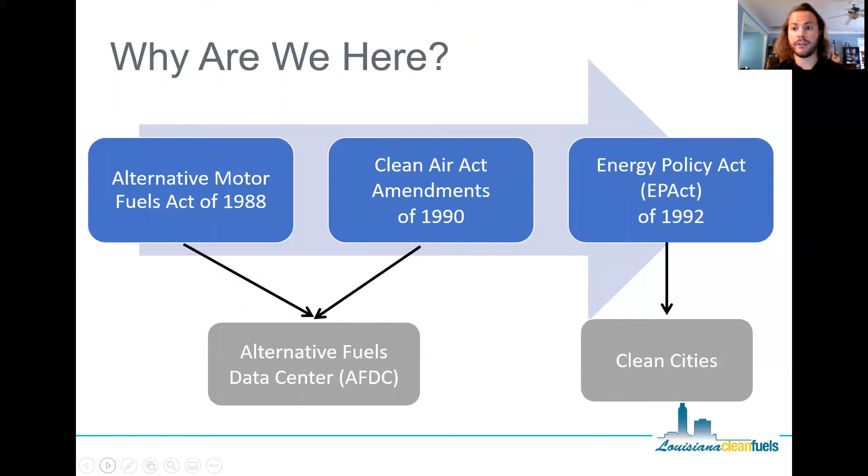And then later on, we had the Energy Policy Act of 1992, and that's really what directly spawned Clean Cities. Clean Cities is a local partnership, a series of local partnerships. There are around 100 coalitions across the country, and within our individual territories, we make up around 80% of the total U.S. population.

And then one of the wonderful things about Clean Cities is that if you're outside of our population or our territories, we'll still work with you. So if you don't quite have a Clean Cities as part of your territory, please reach out to them, because we still love to help in any way we can, and really provide technical assistance and any sort of help that we can. I'll talk a little bit about that in a second.

So, we're part of a Department of Energy program, and the priorities that set the stage for Clean Cities are national security. Alternative fuels are domestic fuels. We produce our own natural gas and propane and hydrogen, electricity, of course. So just all those alternative fuels, we produce them here, not having to rely on any sort of imports for those fuels. It has a lot of national security benefits to it. There's also economic growth.

These fuels being domestic fuels keeps the economy growing here in America. This also results in affordability for businesses and consumers. When you have multiple competing fuels that all work together as part of this bigger portfolio, that competition drives the prices down. And many alternative fuels, in large part because they're produced domestically, are actually cheaper than gasoline and diesel.

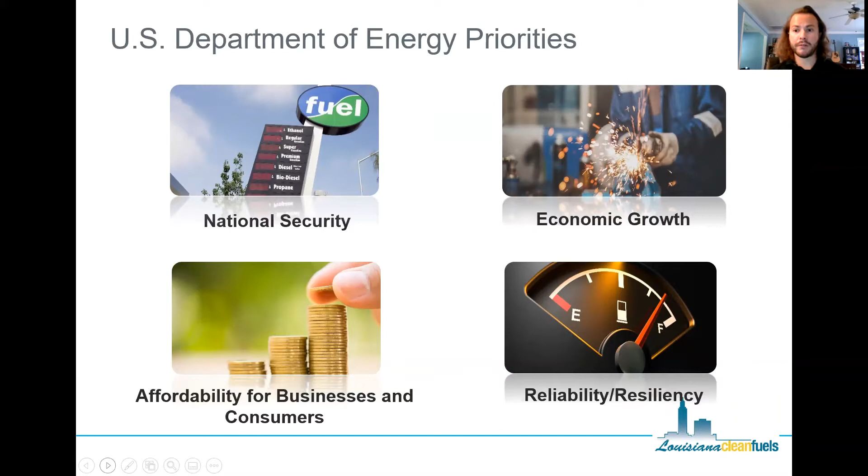And then also just reliability and resiliency. When you have redundant, multiple fuel types, if one of them goes down for whatever reason, say the electric grid goes down somewhere, you can start relying on a different fuel, or vice versa in any other direction. So that resiliency is really a valuable part of why alternative fuels are important.

So how does Clean Cities in particular fit within Department of Energy? Well, we're under the Vehicle Technologies Office, and that office has 5 main components: electrification, advanced combustion systems and fuels, materials technologies, and energy efficient mobility systems, a kind of newer focus that looks at the entire mobility system as a whole and digs down into how different changes affect total energy usage across the entire holistic system. It's a really interesting program.

And then we have technology integration, which is exactly where Clean Cities fits. We really work with the end users as well as the providers and the national labs to figure out exactly how we can best get these fuels in the hands of consumers and fleets, and make sure that they're working as well as possible, and then really increase the efficiency and lower the cost of operation.

And then see down here below, the VTO really focuses on these 4 pillars: energy efficiency, domestic energy security, reducing costs, and global competitiveness of the U.S. economy.

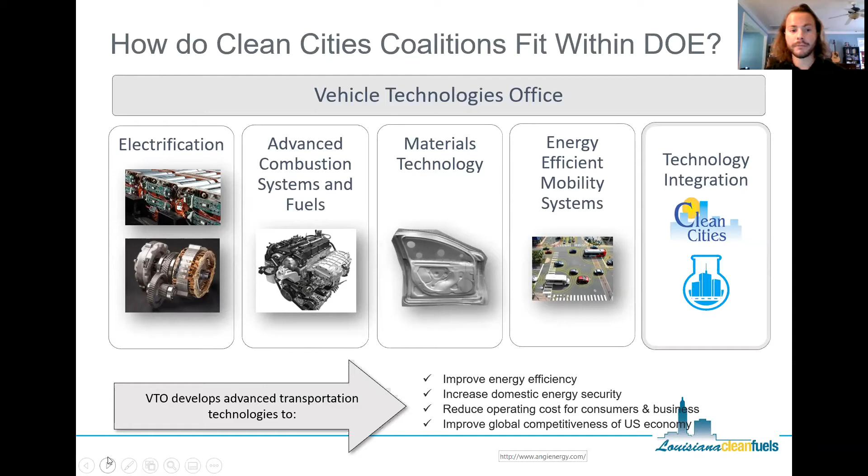We deal with all the fuels. We are what we call fuel agnostic, we don't pick and choose winners. Everything that we do is data driven and tailored to the individual we're working with, whether it's a fleet, municipality, or just individual consumers. We deal with all 6 of the major alternative fuels: biodiesel, electricity, ethanol, hydrogen, natural gas, and propane. And then across all markets, light, medium, heavy-duty vehicles, refuse fleets, transportation fleets, we deal with everything. So really, in any sort of efficiency measure that a fleet or an individual is trying to undergo, we're there to help with anything that we can.

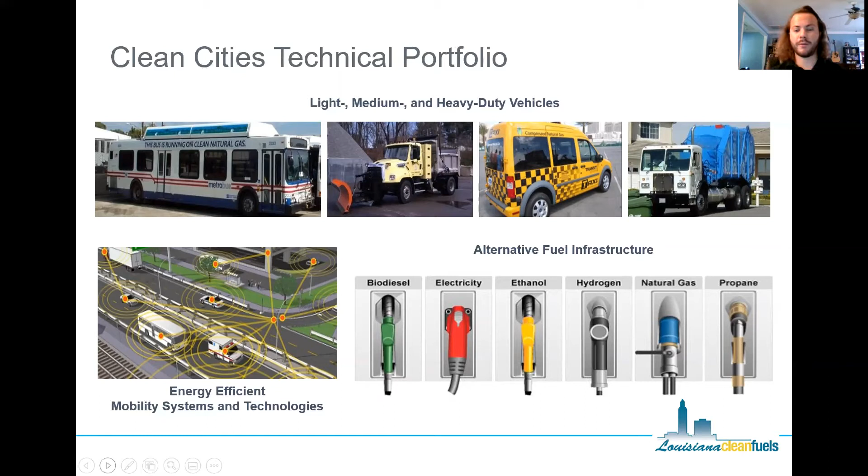I always like to have this slide because this is news. When you talk about greenhouse gas emissions in America, for the last 100 years, the largest emitting sector has been electricity. That's been decreasing over time, with moving towards natural gas or renewable fuels in the electricity grid, which has reduced the carbon impact, along with efficiency gains across the board. In 2018, transportation actually overtook electricity as a greenhouse gas emitter for the first time. So that kind of means the ball's in our court when it comes to dealing with transportation, since we have the largest slice of the pie, and we can work on that.

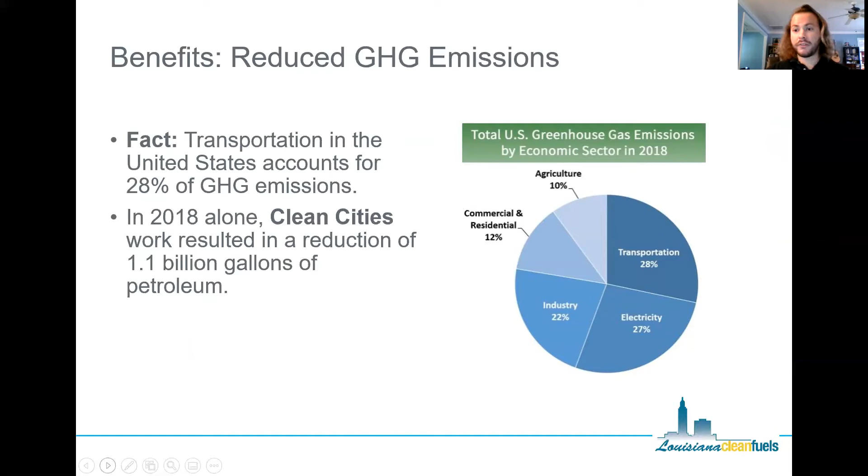In 2018 alone, Clean Cities work resulted in a reduction of 1.1 billion gallons of petroleum, which is an absolutely massive number. That's the work we do: increasing efficiency and moving towards alternative fuels, and that really benefits everybody.

Our executive director, Ann Vail, has this quote that she always loves to put in these things: it is our job to identify, then work to remove the barriers that prevent public and private fleets from adopting alternative fuels and advanced technologies into their fleets. That's really what we do, is remove barriers. I also like to say we're matchmakers as well. If a fleet's interested in something and they don't quite know who to go to get those alternative fuels integrated with their fleet, we'll find the right person to get them in contact with.

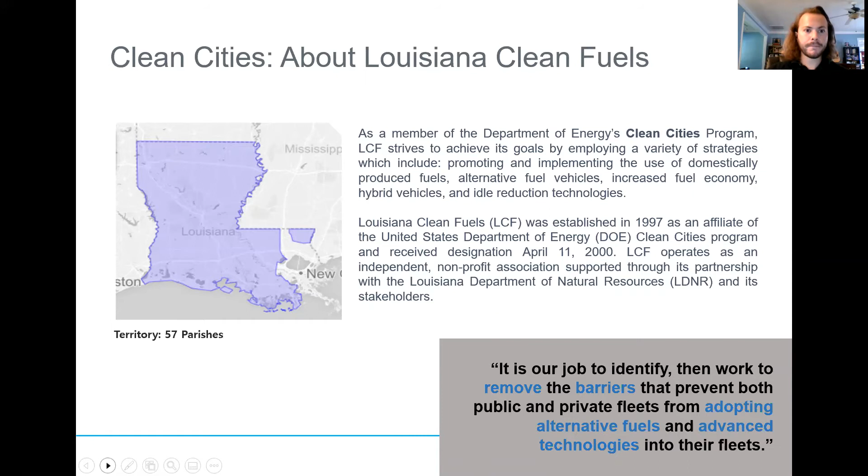Some of our specific programmatic priorities worth talking about are our green fleet certification, where we can really recognize and quantify the work fleets are doing in terms of reducing emissions or meeting their sustainability goals. We also do a lot of outreach and education, which is part of what this is. You can't do anything with technology that you don't know exists, so that's where we fit in, making sure everybody knows about the different options we have, because choice is better for the consumer.

First responder training: alternative fuels aren't more dangerous than gasoline or diesel, they're just less known, and we're trying to break that barrier down. So we do a ton of first responder training with firefighters and local first responders to make sure they know how to handle any sort of incident with an alternative fuel, because they're becoming more popular and more integrated into our fueling mix, and it's important to know how to deal with those situations.

And then also funding assistance. We assist people who are interested in applying for grants with the actual application process or with the implementation process when it comes to alternative fuels. I know John's going to talk a little bit about some of the FOAs, the funding opportunity announcements, that come out of the work we do. We really help make sure that's all integrated and done well the first time.

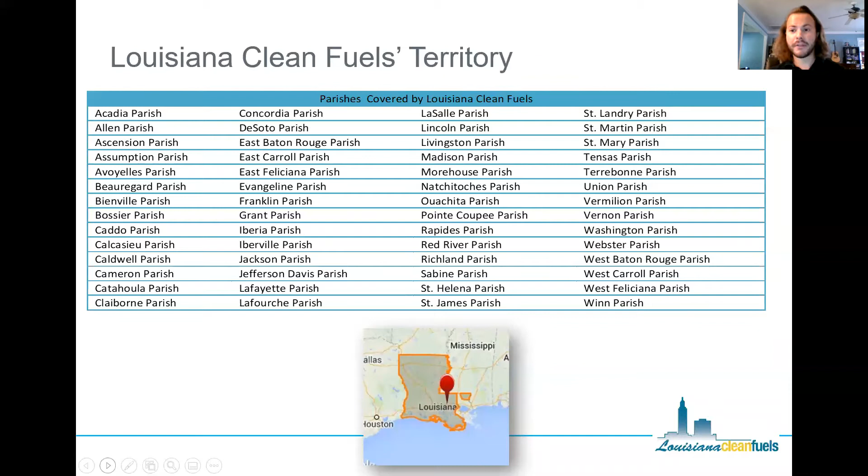And then a big list of all the parishes that we cover. It's a lot, so we kind of work across the entire state.

Before we go on to the panelists, I want to set the stage for one of the difficulties with natural gas that isn't really talked about very much, and that's the fact that it's a variable fuel. It's easy to think that when you tap into a pipeline you're going to get the exact same thing here versus in Texas versus Arkansas or anywhere else. That's really just not true.

So within one particular pipeline you'll get variability, maybe even just seasonally, but also regionally you'll have variability, and that needs to be accounted for.

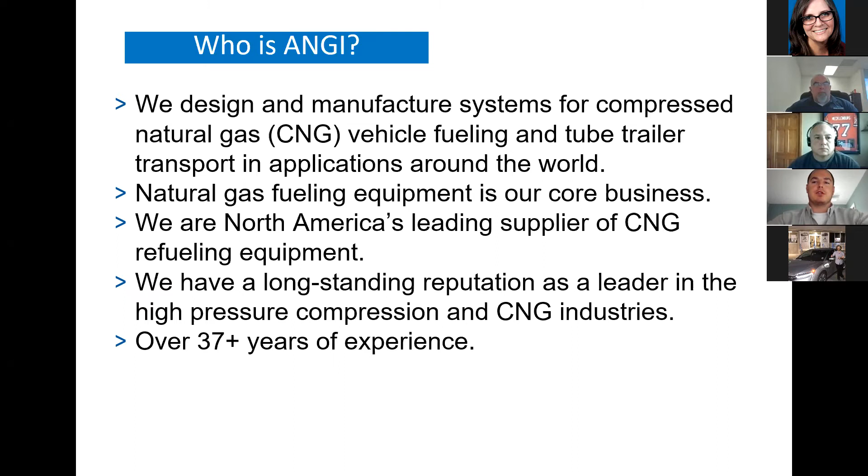But in terms of ANGI, we manufacture systems for compressed natural gas vehicle refueling and tube trailer transport. We're one of the industry leaders in supplying that refueling equipment. We've been in the industry for roughly 37 plus years now, with a long-standing reputation in high pressure compression and CNG refueling.

So the more traditional gas pumps, liquid fuels, you'd see at a typical refueling station - ANGI was acquired by Gilbarco. A couple of more recent updates here: ANGI has the NG100E Fleet Pro, which is geared towards smaller fleets, but it does allow for some expandability and quick deployment, as well as some smaller CNG equipment with our NG75, and our remote monitoring system, which I think we'll probably speak to throughout the day.

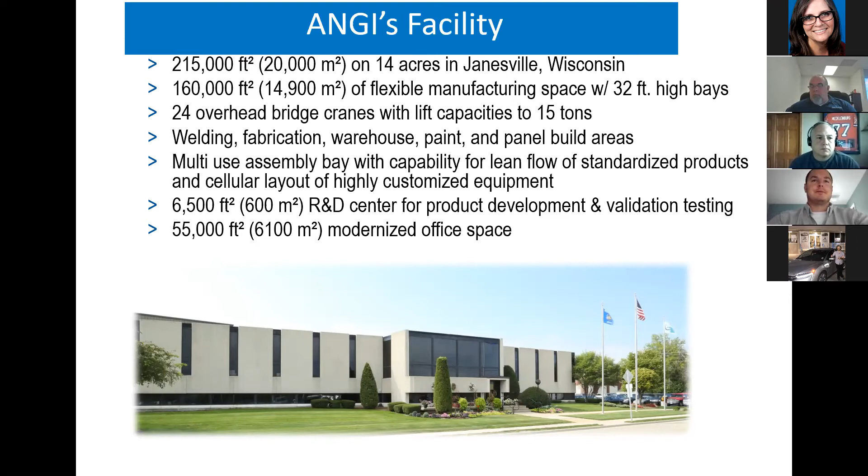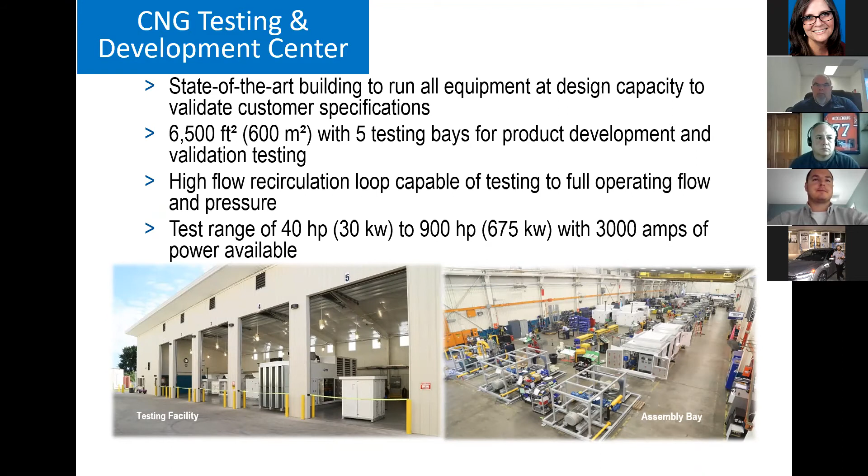So a little bit more here on the testing facility. As I mentioned, we do test on natural gas, and our testing ranges are anywhere from 40 horsepower up to 900 horsepower packages, which is what ANGI looks at. We do have our ISO 9001:2015 certification, so just wanted to put this up here as a slide.

In terms of maintenance and support, I think this is going to be a bigger part of today's discussion, but really ANGI wants to back our equipment through customer support, whether it be through training, our commissioning services, our repair and maintenance services, as well as after-sales support - if there's questions on the site, we've got a 24-hour call center that can be called into.

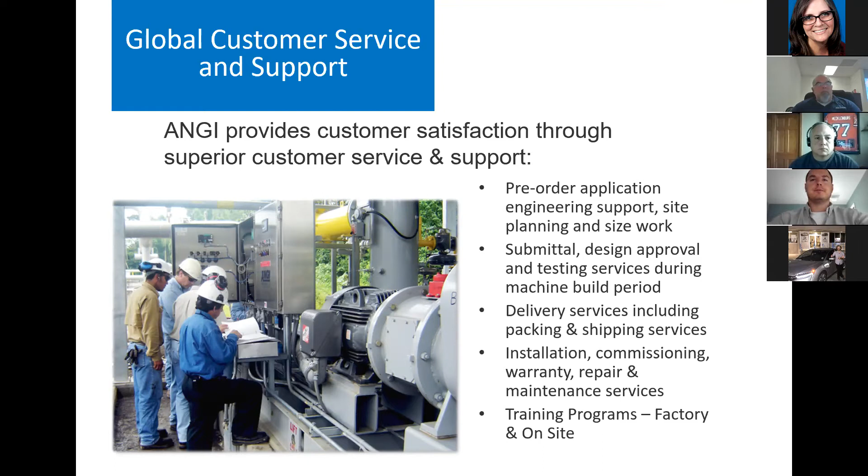In terms of capabilities, depending on the conversation today, it may make sense to refer back to a few of these, but I wanted to highlight just how a traditional CNG system, or the variations it could have. I'll walk through this first one piece by piece, and then the other ones will just mention some differences.

In terms of the CNG system, ANGI typically has an inlet gas dryer. It will be a desiccant-based dryer to remove any residual water that may be coming from the inlet source, as well as the compressors, which are the next piece. These can be anywhere from one compressor up to several, depending on the need of the site, based on inlet pressure and flow downstream.

This system here is showing a priority system. So if we look at the different banks of storage, what we're doing here is filling based off of differential pressure, and we do that through actuation of valves within the priority panel. Using the 3-bank priority system, we're using CNG dispensers for fast fill applications, where you can fill based off of that differential pressure. If you've gone through all 3 of the banks, we start at low, go to mid, and then high. If the demand pressure of the vehicle isn't met after going through all 3 banks, then a compressor is started or redirected to direct flow to a vehicle up to the temperature compensated pressure that John was speaking about earlier.

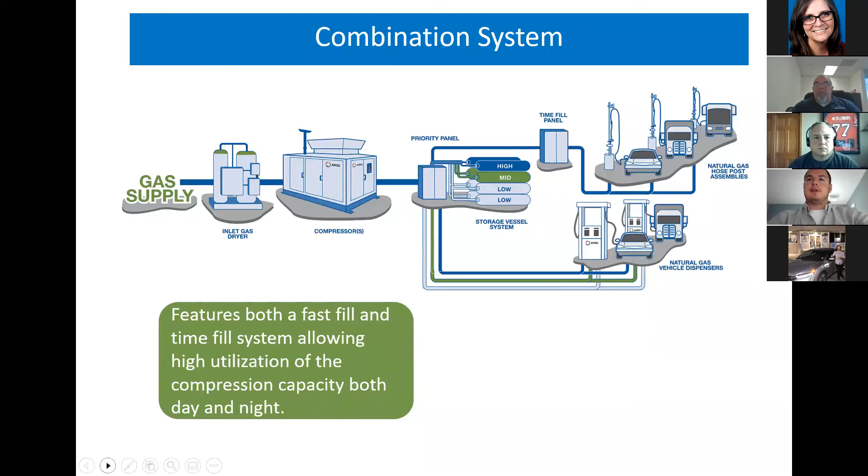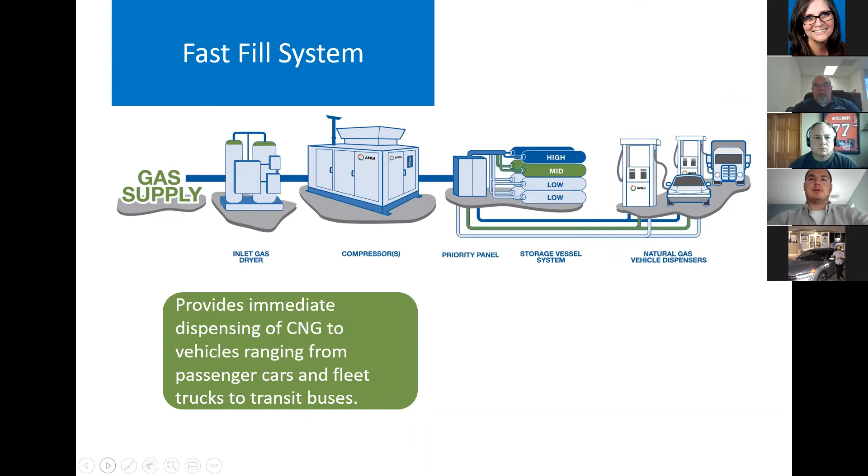As we show here, and what we'll likely discuss today, is we're showing two compressors on the site. One of these can potentially be sized for the entire demand of the system, with one compressor allowing for redundancy, or they could be equally sized to meet the demand. If there's a maintenance concern, or if a compressor is offline for a period of time, there's still a compressor able to run to add redundancy for the system.

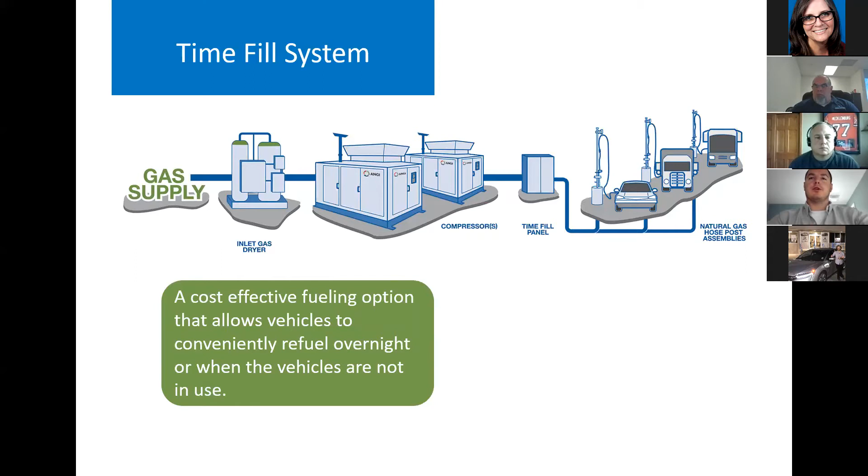One thing that we're seeing, and Tyler and John both mentioned it, is biogas — whether it be compressing biogas for vehicle refueling, or injection into pipeline, or other alternative means for the biogas.

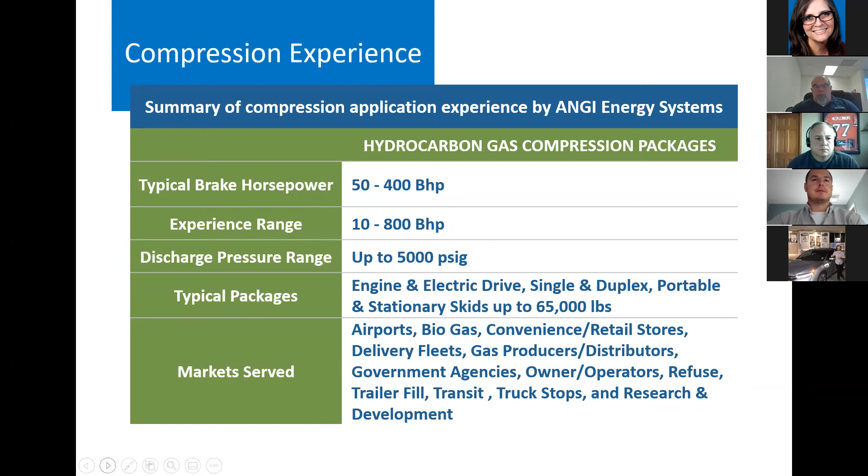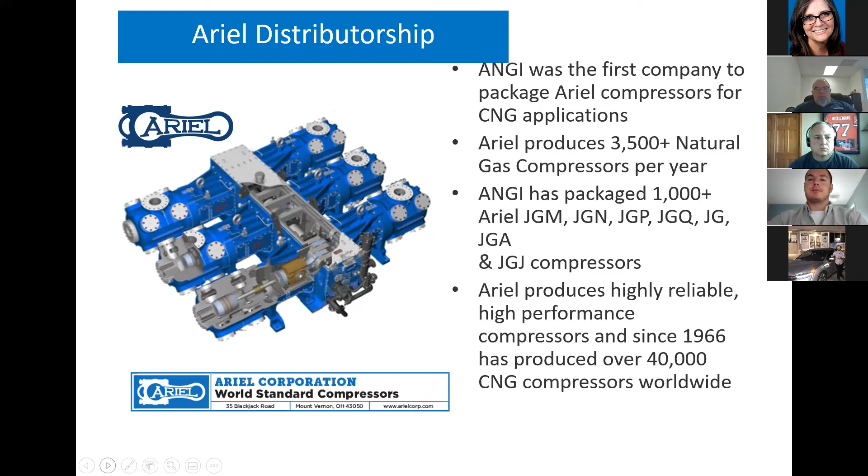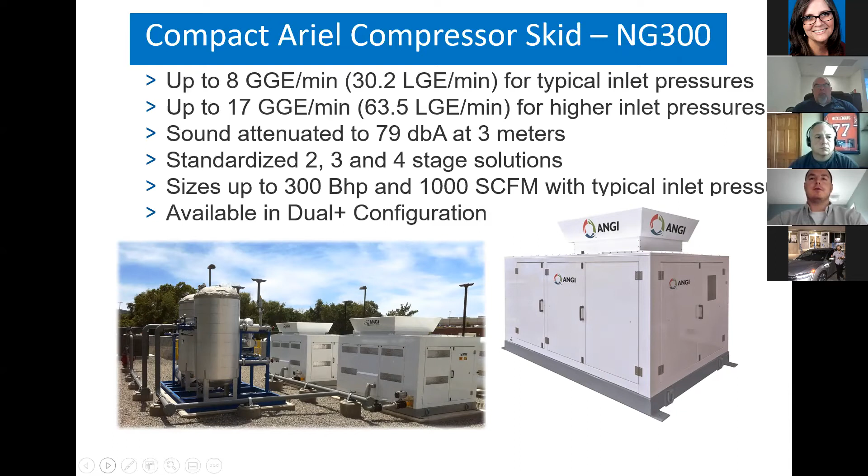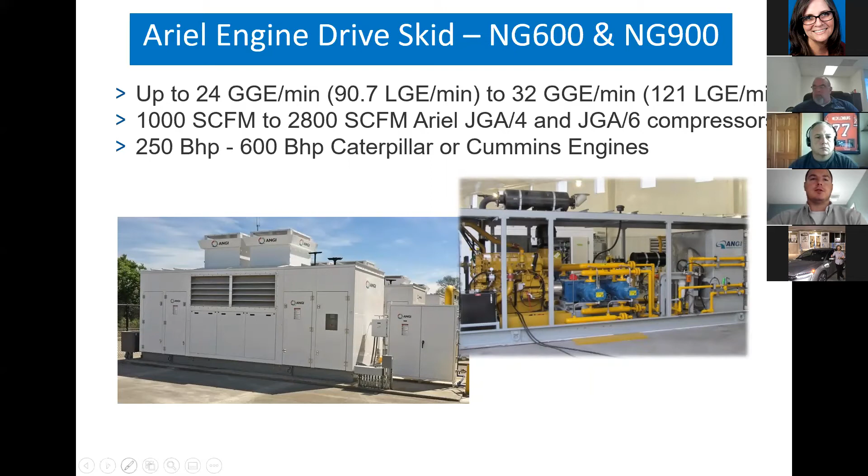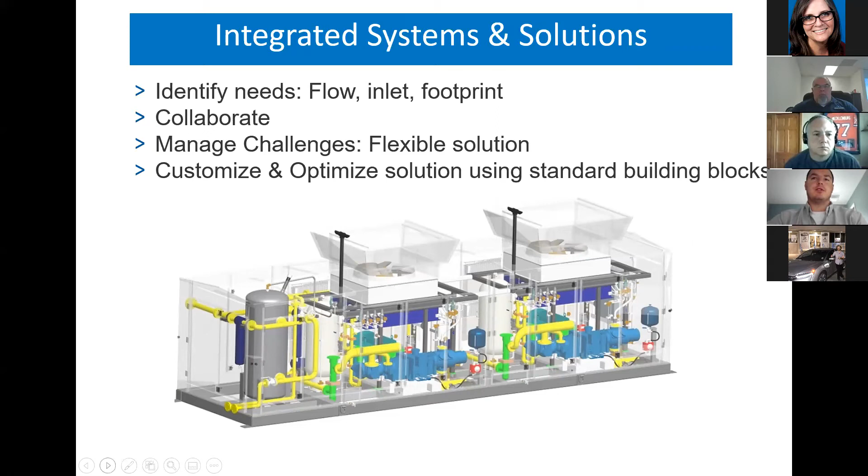The next slide here is going to be our larger packages, the NG600 and the NG900 — similar platform, but just larger materials for these two compression units. I do want to mention integrated systems, whether it be a quick deploy system for something that needs to be on site for a period of, say, six months, or if it would be a permanent installation. We can look at a system where it's all packaged into one, which may reduce installation costs and things of that nature.

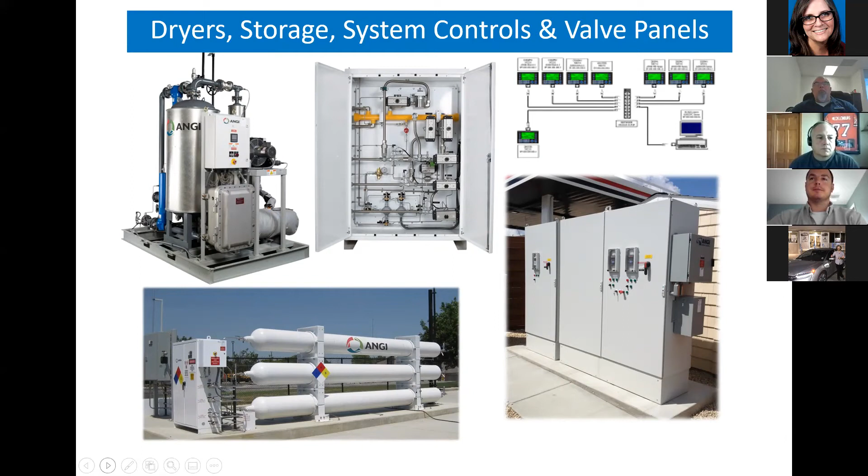This last slide here, just wanted to mention a couple other aspects of the systems ANGI packages. We've got the gas dryer that's ahead of the compression that we saw on the previous slide. The picture here in the middle is the valve panel, really the brains of the operation for the site. We do have motor starter panels that accompany our compressors, as well as gas storage for that differential filling that we spoke on. I think that's all I've got.